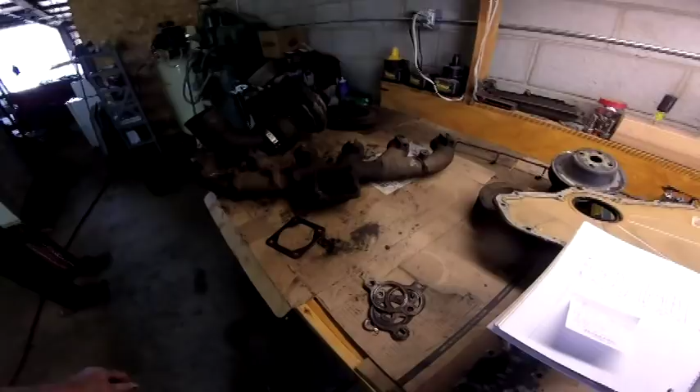I've got you over here to the workbench where I brought the manifold and turbocharger combination off of the 8.3 over here. I had a hell of a time getting this thing apart. The turbocharger off the exhaust manifold, it was jammed on there. As I had mentioned in a previous video, it was very hard to get to these back bolts while the manifold was on the engine.

But once I got it over here, getting to them wasn't the issue. It was how tight they were. Now, what I did is I was able to get one of them loose just by putting a wrench on it. The other three I had to actually apply heat. I just brought a little propane torch over here, applied some heat to the nuts and got them loose. As you can see, three of them came off.

The fourth one broke actually. Even though I had applied heat to it, it broke. But that won't be an issue if I, for some reason, happen to reuse this. What I'm going to do is I'll take it over to the welding bench. Just tack a standard nut onto it. I could probably get a 3/8 nut to fit over that thing and just tack it on there. I'll apply a little heat to the manifold and work it off with a wrench after I weld it and it cools off.

So the other reason that I kind of brought you over here is I wanted to show you this manifold. Now what I've done is take some measurements on this existing exhaust manifold and the turbo housing inlets, the port sizes.

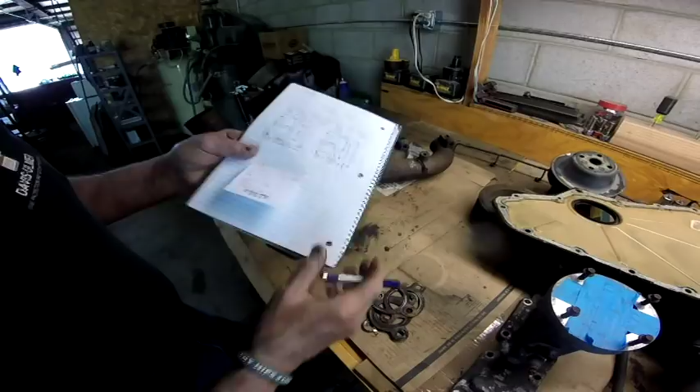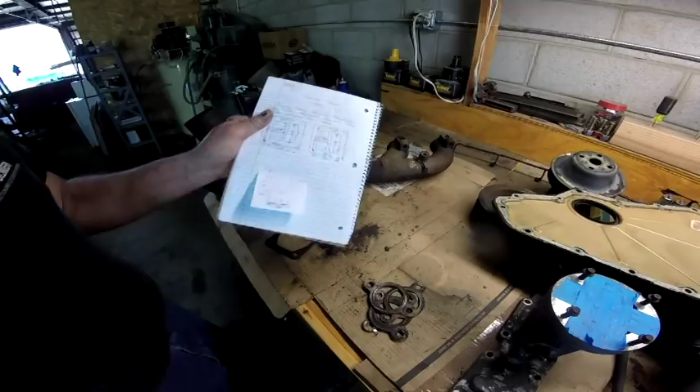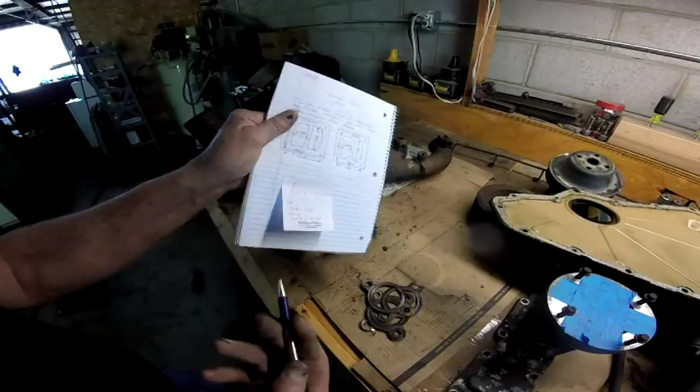Now in comparison, you can see that the exhaust manifold is 1.375, or 1 3/8, by 1.950 inches long, and compare that to a new style T3, which is 2.37 by 1.75. So the T3 is going to be a lot bigger, and the T3 is the smaller of the new standard size manifold outlets. T4 goes up to 3 by 2 basically. So you can see that the T3 is a lot bigger than what I have here.

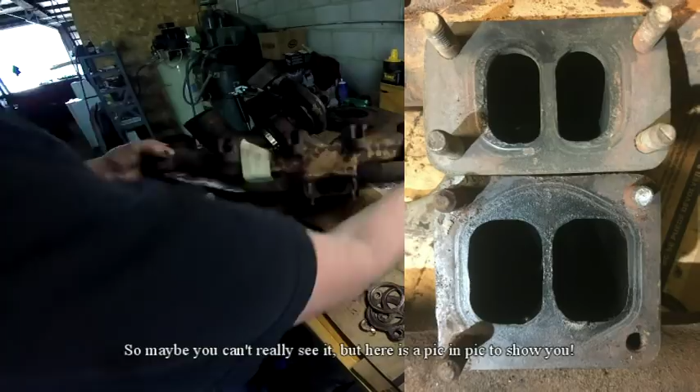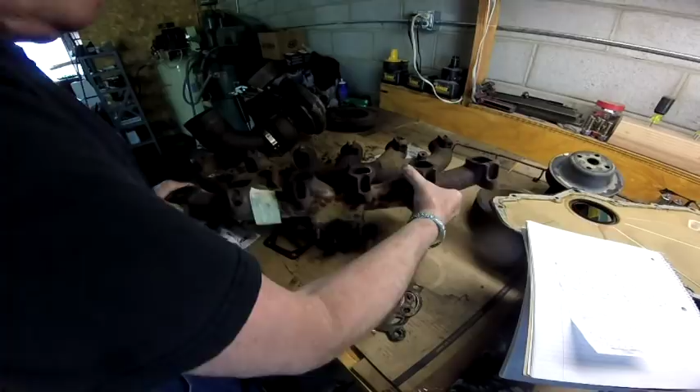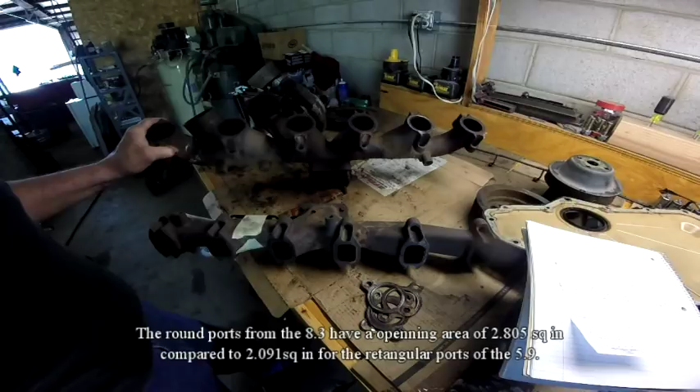Now, just for reference, I have an exhaust manifold off of an old 5.9 Cummins, and I'll bring that over here, and you can see how much bigger the ports on this exhaust manifold are to the flange or turbo adapter than the old 5.9 was. And in relationship, there are the exhaust ports, and you can see how much bigger basically the whole manifold is over the old 5.9. Now these are rectangular ports on this, and these are round ports, but again you can see there's probably a lot more area into this.

Now I've been told I can get an exhaust manifold. I haven't found one online, but I've been told by a very reputable diesel guy that I can get an exhaust manifold for the 8.3 that's going to adapt to that T3 housing. So that's kind of what I want to run. I want to run a BorgWarner 300 series, probably a 366, or 66 millimeter inducer housing opening for it. So I just wanted to bring you over and show it to you.

Again, I had a hell of a time getting that thing. After I got the bolts off, I even had a hell of a time separating the exhaust manifold from the turbo. I actually had to set it up there and hit on it. There was a lip here where the turbo housing overhung the exhaust manifold, and I had to soak it with PB Blaster and kind of hit on it with a hammer and chisel to get a gap to open up.

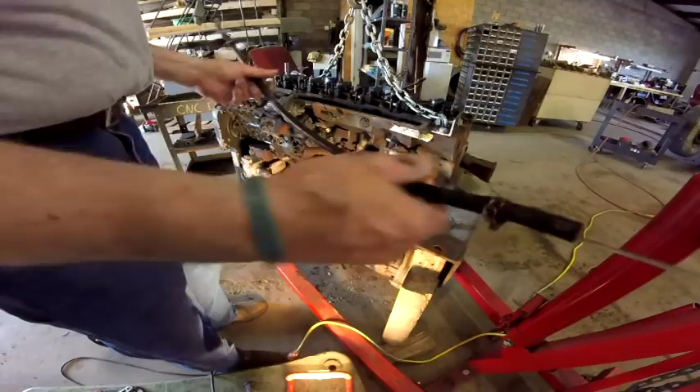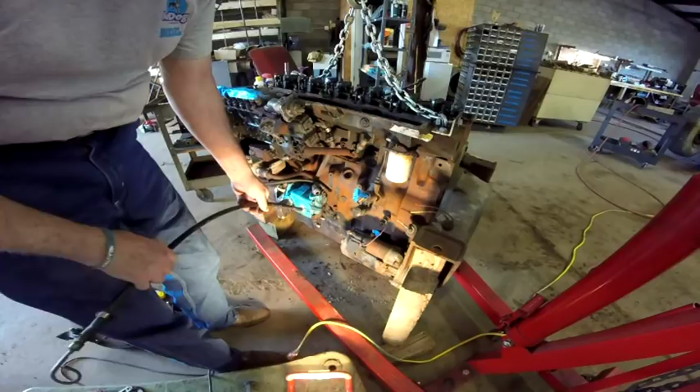Dipstick tube out of the 8.3. Reason why I'm showing it to you is because sometimes they're a real pain in the ass to get off. Plastic, black plastic, and then it has a mounting spout that's attached to the block, but I don't know what it is, if it's because of the heat kind of adheres that plastic to that mounting spout, but usually they are such a pain in the ass to get off. You usually break them.

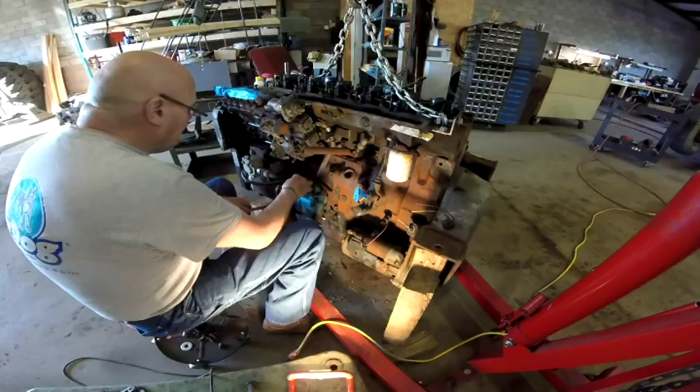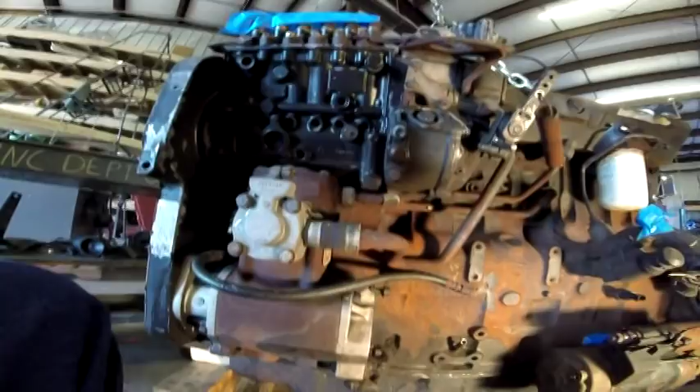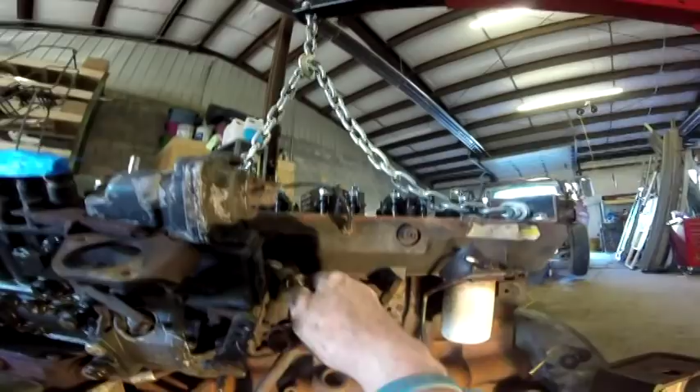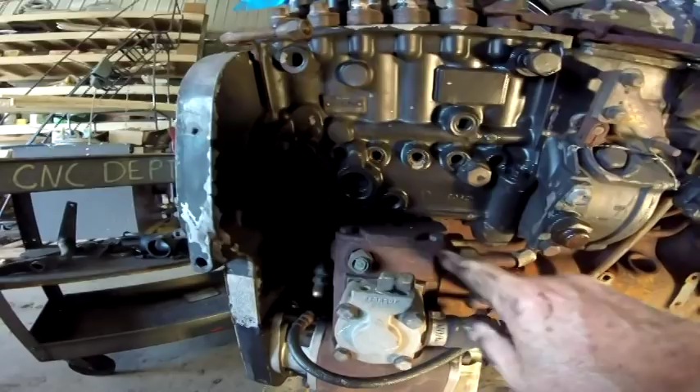I'm just going to use you handheld here with no gimbal, so it might be a little shaky. What I wanted to show you is intake for the air pump. It's taken off of the intake manifold, so it's actually getting turbo pressure into the intake for the air compressor, but the head of the air compressor is actually cooled. It has a cooling port into, see, a supply and a return on the cooling, which is pretty cool.

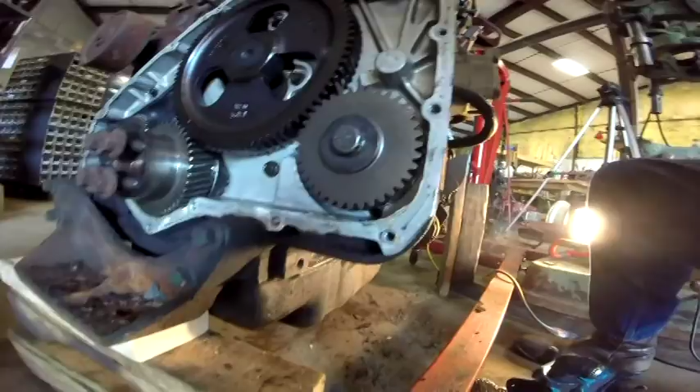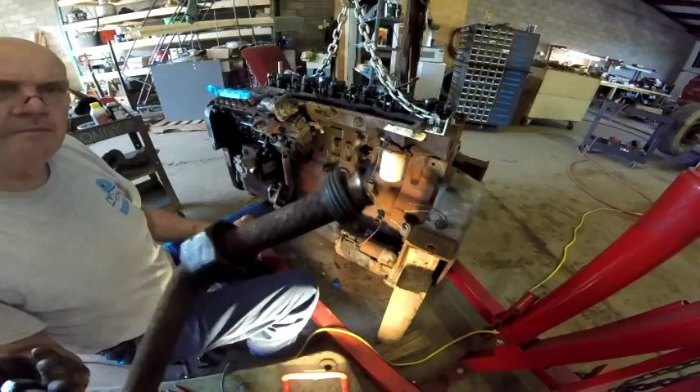Oil line for the compressor, and I've got to assume it probably drains out through into the gear casing. Oil line between compressor and engine block. I'm just pulling off that supply hose that feeds from the intake manifold to the air compressor. One of the cooling line hoses. And the second cooling line hose. Ever seen those? They're flared, but they had those big rubber washers on them.

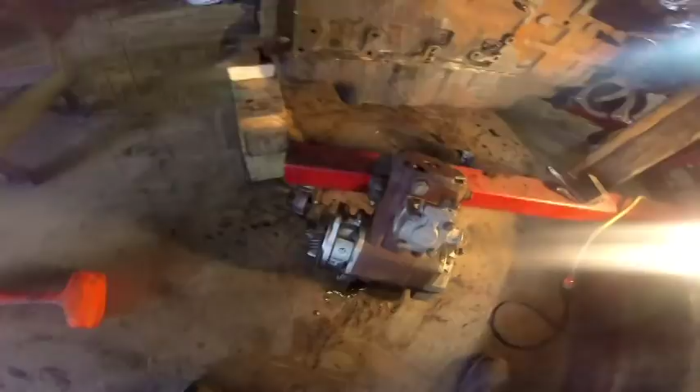And the starter's off. I just took that bracket over to the parts washer and cleaned it off. It was just covered with grease, gunk. But on the back side of it is where the ground cable had been attached to it. So there's the air compressor out, and it's a hole in the housing the gear went through.

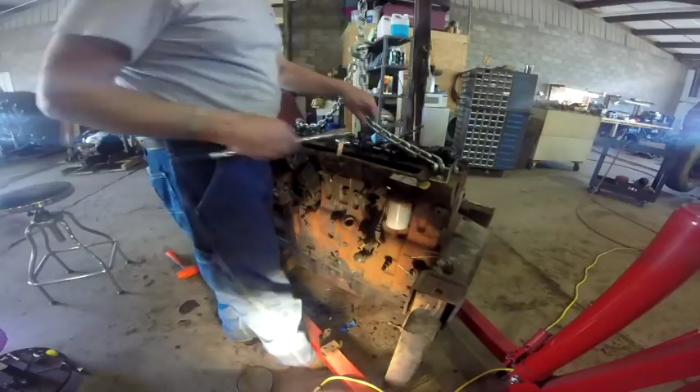So as I said before, the air compressor's off. I'm pulling the rocker arms off right now, and I'm setting them over on the bench. I've got a piece of clean cardboard over there that I've marked out for the 6 cylinders, and just setting them over there in order. After I get the rocker arms out, I'll pull all the push rods out and take them over there too.

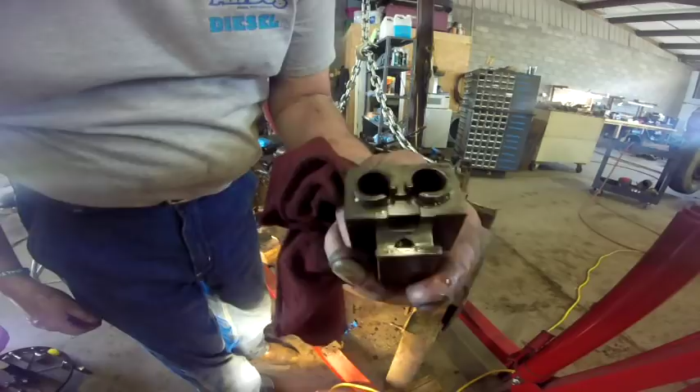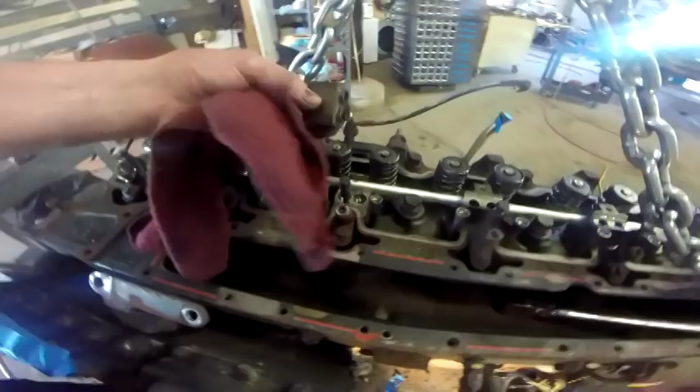I just kind of wanted to show you this, how clean that thing is. Let me pull you off the tripod. What it is, these things that go over, they fit over like that and hold that. And what I assume it is, some kind of oil dispersing tube. Until I get it out of there, I probably won't really know exactly what it is. I mean, I could go to the manual and look it up, but until I get it out of there, I won't know exactly what it is.

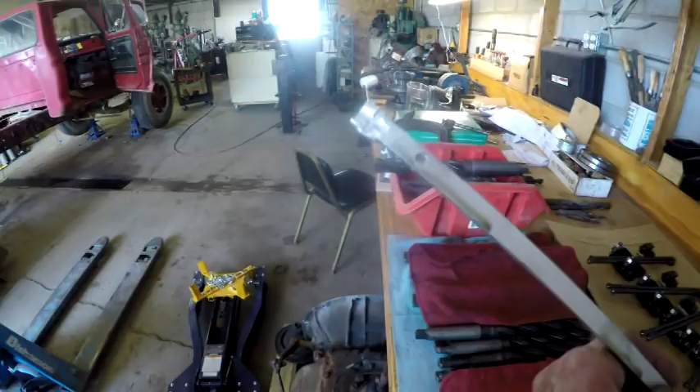Okay, I'm over here at the workbench, and I just wanted to show you that layout of the rocker arms and that oil tube. And that is an oil tube. I told you that I looked at it and I kind of thought that that's probably what it was. So the oil comes in from up through the head into that port. Now there is another port on the other end of it, but that port in front just sets on top of a casting, or part of the head casting, so it isn't ported back into the head. As you can see, there are small holes in the side of the tube where the oil comes out through. So it enters up there, comes out through those small holes in the side of the tube.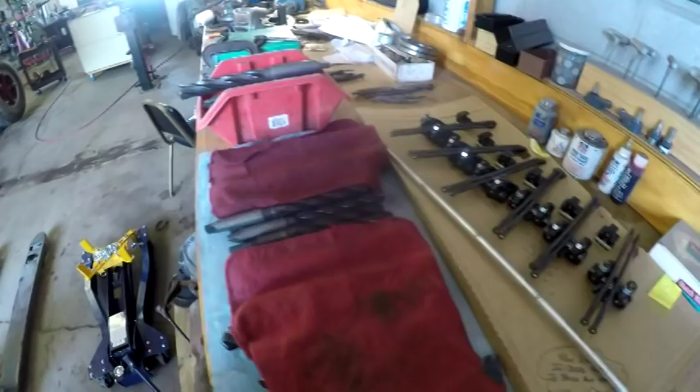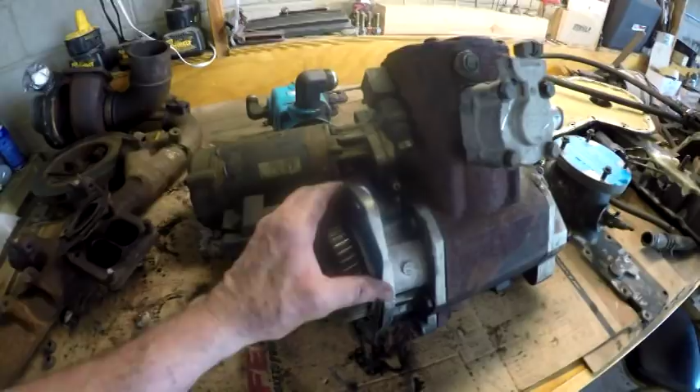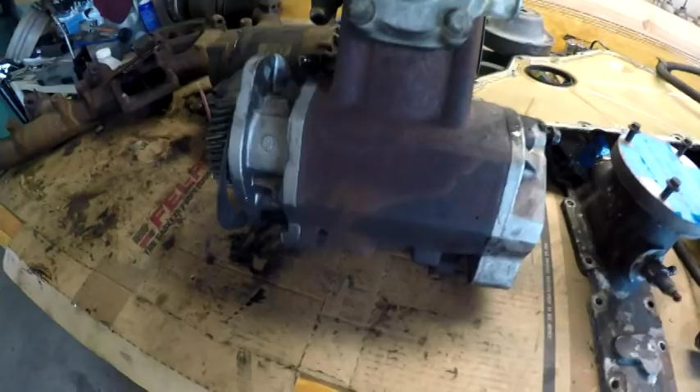The other thing that I just wanted to clarify, I talked about that compressor. I was kind of shocked to find out that the gear housing had a hole big enough for the gear to just slide back through, so that compressor can be taken out without having to remove the gear cover plate. I didn't know that. If I had looked in the manual, I probably could have found that, but it was probably a lot simpler by trial and error and figuring it out on the engine.

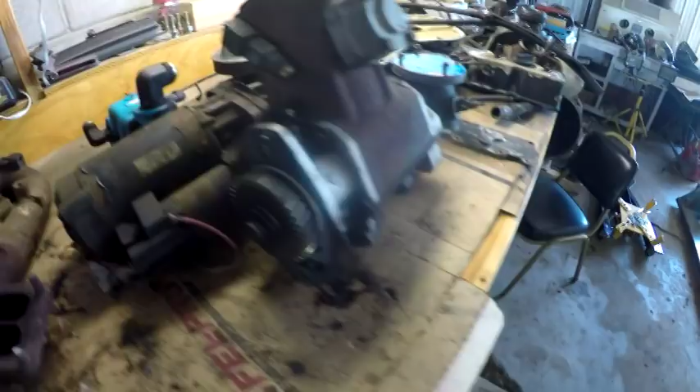But anyways, there is that hydraulic pump, air compressor, starter. I've got to pull the P pump off still. And then I will probably remove the head over there too, but I'll bring it back.

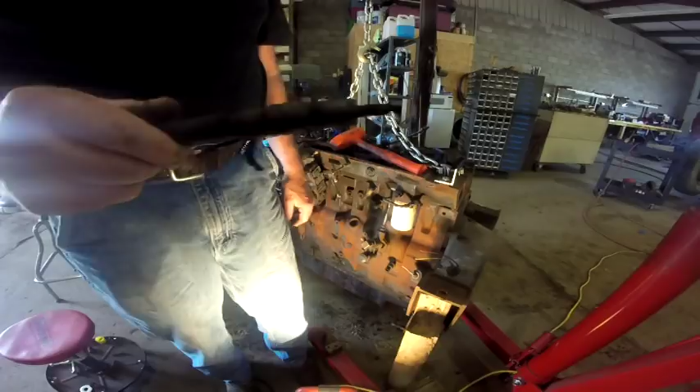This is a number one injector out of the number one cylinder. Now, it might not be as bad as it looks. That's just dirt that kind of goes down and gets caked in between, because the injector kind of sits down in the cylinder. Although it does, that appears to be like a plastic housing. But I'll bring it back.

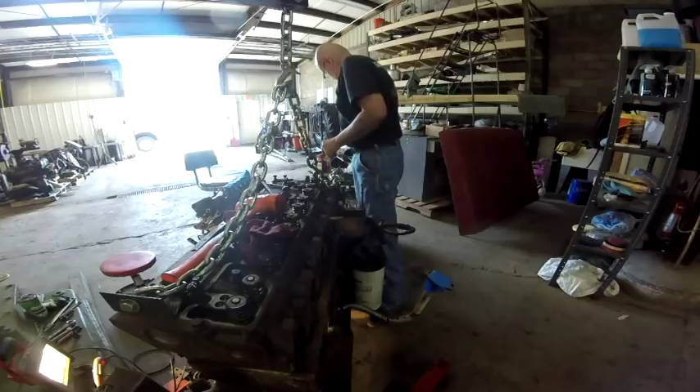What I did is pull these lines off too. Fuel line, getting ready to pull the head off. So I'll bring it back. See if I could get something that fits on here snugger to try and get a little twist on those injectors before I try and pry them out. Removing head bolts.

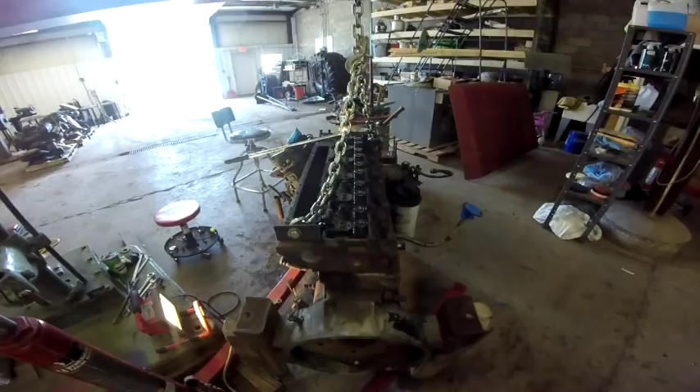Okay, you're going to probably wonder how I went from the injector removal to head bolt removal. Well, what my plan had been is to remove the head and take it over to the bench and then pull the injectors off. One of the things that isn't going to be shown here but was shown in a shop update is there was a couple of tools that I made for trying to remove the injectors. One was a pry bar that I slotted that would try and go around the injector so that I could pry it up and out, but that didn't really work. At this point in time, I don't even know whether I had made that tool yet or not.

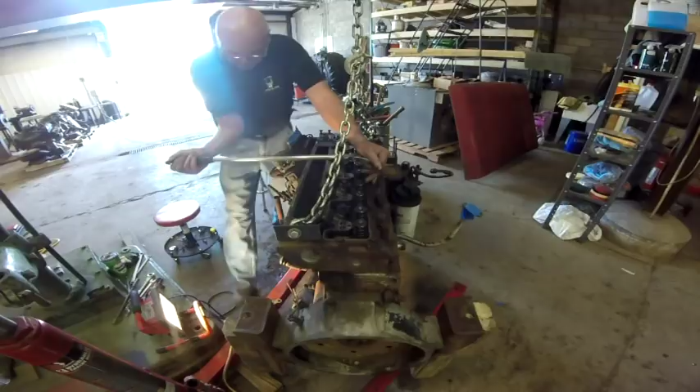But I started removing the head bolts only to realize that there was going to be an issue. On the 5.9 Cummins, you can't remove the head and take the injectors out afterwards. You'll see what the issue is here in a second. And that one. Move that relief line

for the cooling system. So what was probably no time to you actually took a long time because I couldn't find my 13mm, the standard one. Combination open and box end. And I spent a long time looking for it and still actually haven't found it. Actually just grab the cordless impact.

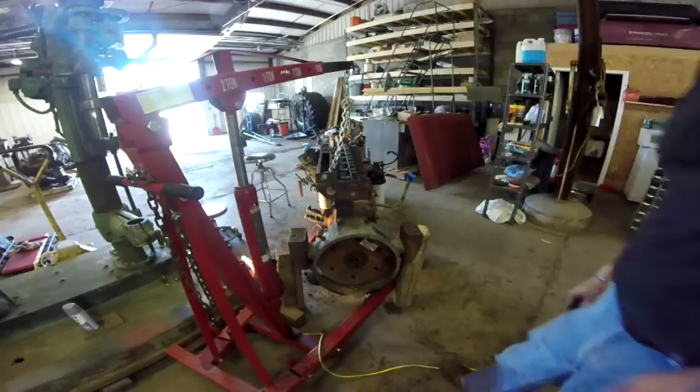Let me back up a little bit. What I'm going to do is put some tension on it with a lift. Two, 4, 6, 8, 10, 12, 14, 16, 18, 20. Let me just double check the manual and make sure I've got all the head bolts out. It almost feels like there's a bolt in there. I went over to the manual. Let me actually.

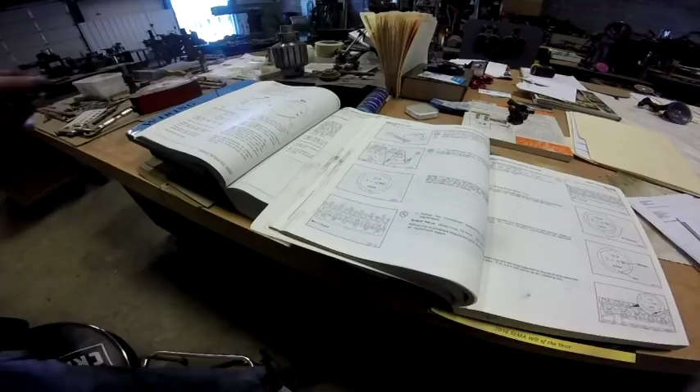I'm going to take you over to the manual and show you, because when I looked at the manual at first it goes to 26 and there isn't 26 bolts. I don't know what they've done, but let me take it over there and show it to you. There it is. Just something to use as a pointer here. You know what they're doing is they're showing those injector bolts. I wonder if those injector bolts are holding it.

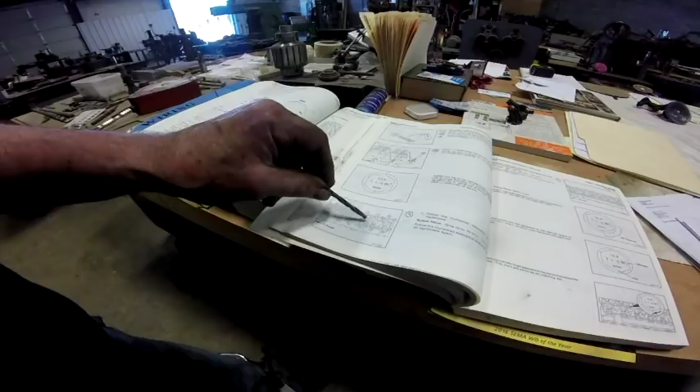Head bolt, head bolt, head bolt... head bolt, head bolt, 20. But they're showing those injector. I wonder if they're into the block. Let me go pull them out, see if it makes a difference. I'll bring it. Now I have most of them out, but let me take the other two out.

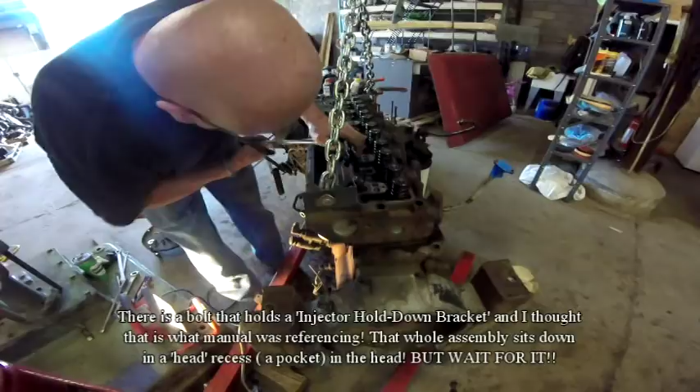Oh, you know what it is? There's a bolt down underneath that injector. No wonder the damn head wouldn't come off. Now I've got to get them injectors out. I was having issues getting those injectors out. They have to come out now. Let me, I've got that one injector out. I can show it to you. Damn, I never even noticed that.

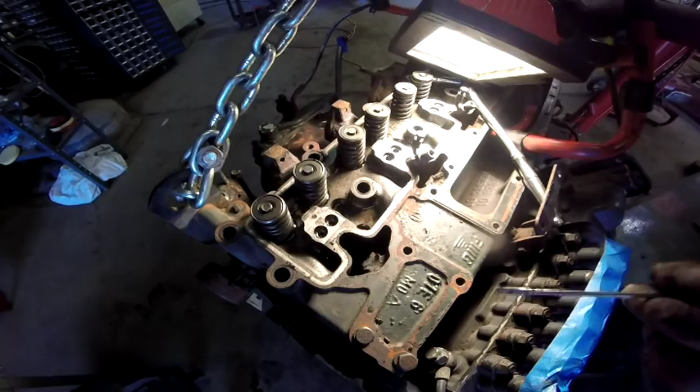Let me, I'm going to shut you off for a second. I'm going to put these over at the bench and I'll bring you back and I'll show you the hole. Okay, that's the hole where that injector goes. And I can't even see it. I've got to clean it off.

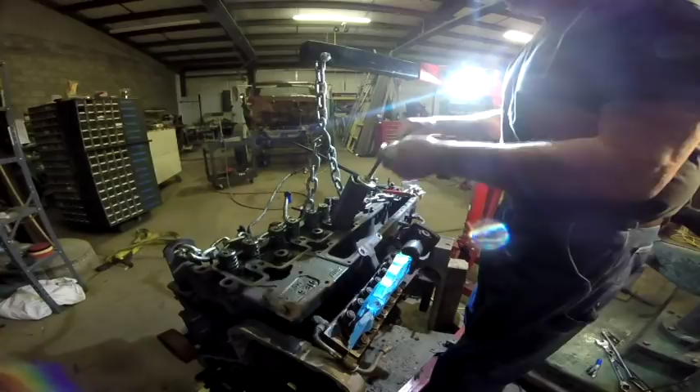See down in there? Yeah, I got to get the rest of those injectors out. Okay, this is a continued process of trying to get them injectors removed. Okay, I'm not going to get into a lot of detail about this. There's a lot of footage of me trying to get these injectors out.

If you go back to my shop update of 531, you will see this tool, and I talk about the other tool that I tried to make. The first injector came out fine. The other injectors would not come out. So I ended up having to make, tried to make some tools to get the injectors out, and that failed. And the tool that you see me using right now is a tool that was successful.

However, 3 of the injectors came out as a total piece. 3 of the injectors broke. And I will go into that further in another video. But let me just say that 3 of them broke in taking them out, and those injectors were in there so hard, this tool that you see me using, the thread started stripping on the all-thread rod and the nut trying to get them out. So I will go into that in greater detail.

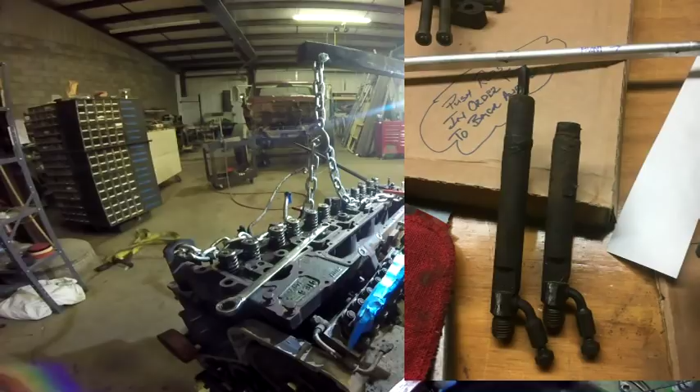I'll just throw a pic here of the broken injectors, just so you know what I'm talking about. Heat build up into that nut. What I'm talking about is that nut was getting really hot from the torque of that bolt. But anyways, I will throw that pic of the broken injector, and we'll go into detail of how I'm going to try and get them out of the heads in a later video.

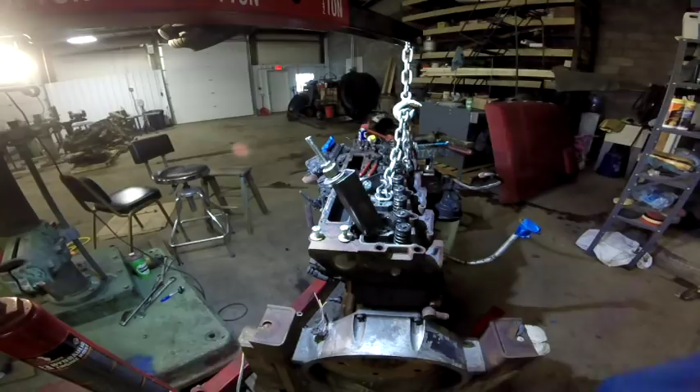Okay, I've got you at a little bit of a different angle on the different side of it. Okay, so I'm going to leave a little bit of this clip in because you're going to see one of the broken injectors as it comes out. And then I'll cut the rest of it out. Yeah, it broke too. Well, I'm really going to have to do some research. Kind of fighting every step of the way.

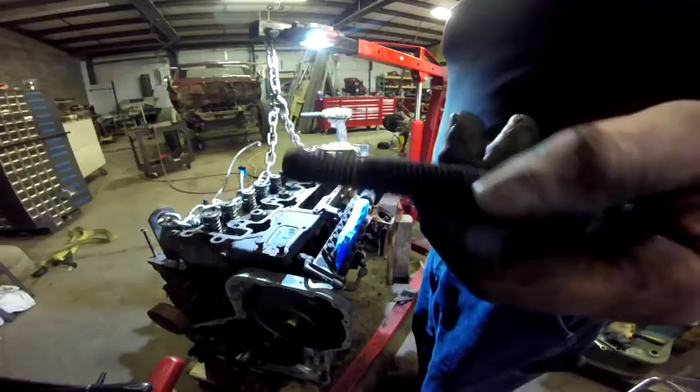A little hard to get them bolts out of there. Okay, this is a bolt that came out of the fourth cylinder, and it kind of fought me all the way out. And look at it, it's got junk in the threads. I'm gonna have to really take a look at the tap on that to see if it doesn't look like it was cross-threaded, but it sure looks like it's got a lot of carbon on the bolt. Got to look at that head gasket in that location and take a real good look at that tap.

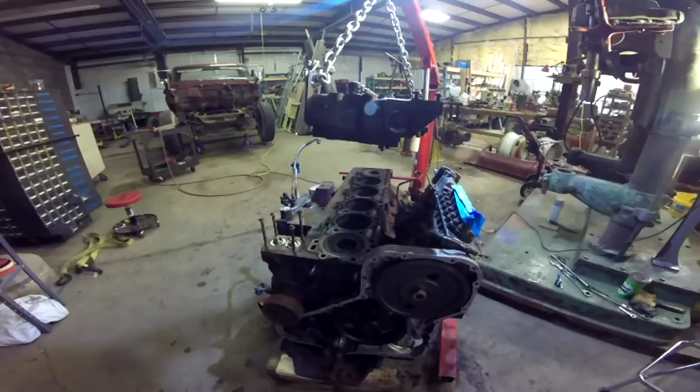Okay, there's a head off. I've still got to get her over to the bench, but it's off. It's up in the air. Let me go handheld, and I'll show you the tops of the pistons, but with the exception of the carbon buildup on the top of the pistons, they look to be pretty good. I'm not really seeing any cracks or anything in them, but again, let me wash my hands and get the handheld camera and take you with the light over there.

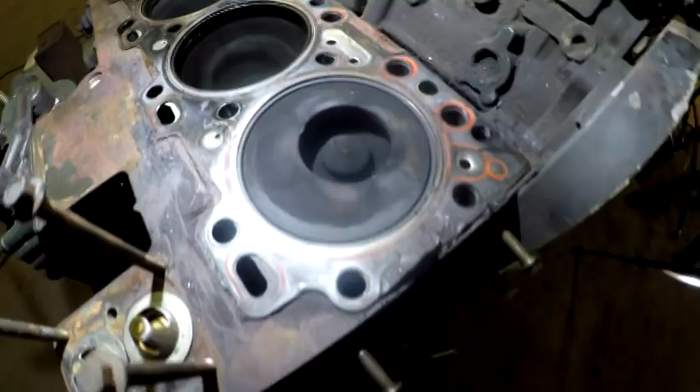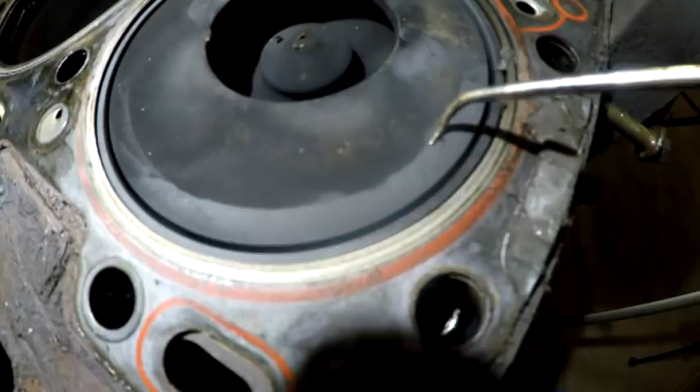Okay, we're handheld and we're over to the piston right now. This is number one cylinder, and what I was talking about, little carbon buildup, but not a lot, because you can still identify the numbers 28, and it looks like a /17. This right here is the susceptible place on these pistons where they end up sometimes cracking. And in none of the cylinders am I seeing any cracking. Sorry for that bump. Clean cylinder walls. They really look good. Now, I will go into more detail as I do it.

One of the things I wanted to mention is 1, 2, 3, 4. This is the bolt that I had issues with, and you can see there is some buildup around that bolt hole. As you see, this is a bolt hole on number 3, number 2, number 1, and then back to 4. We might have been getting a little blow by on that head gasket into that bolt hole, or something was going on with it.